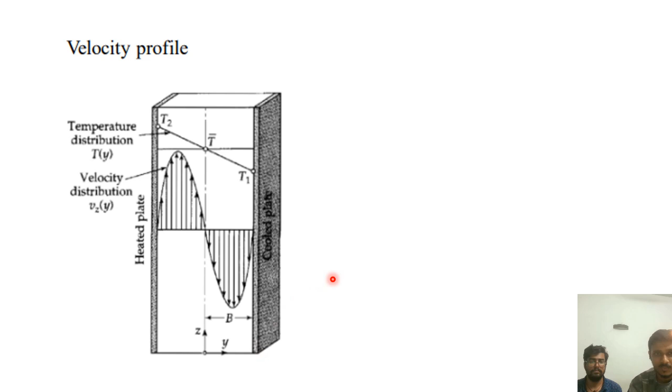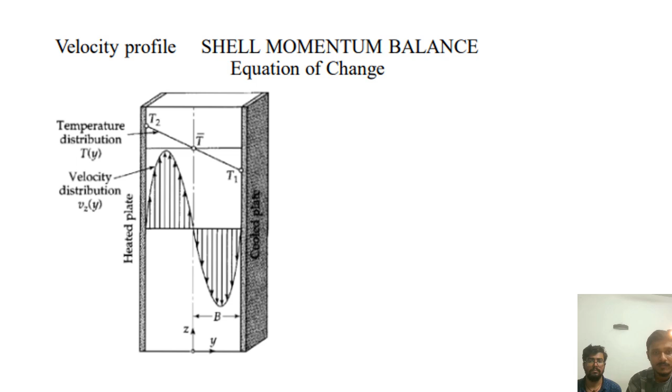Now we will apply the shell momentum balance equation or equation of change. For that, we have these equations. Why will we use the Cartesian coordinate equations? Because this is a rectangular box, and in this rectangular box our equations will be easier in the Cartesian coordinate system.

Next, why will we only consider the z equation of motion and not the x and y equations of motion? The x equation of motion is not considered because there is no variation of velocity in the x direction. And the y equation of motion is not considered because in the y direction also there is no variation of velocity and end effects are neglected. Therefore we will be considering only the z equation of motion.

In this z equation of motion, we will be substituting tau xz using Newton's law. Substituting it here, we get this equation. In this equation, a lot of terms are zero. Let's see one by one which terms are zero and which are non-zero. The first term, dou vz by dou t, is zero because of steady state. Our system is assumed to be at steady state.

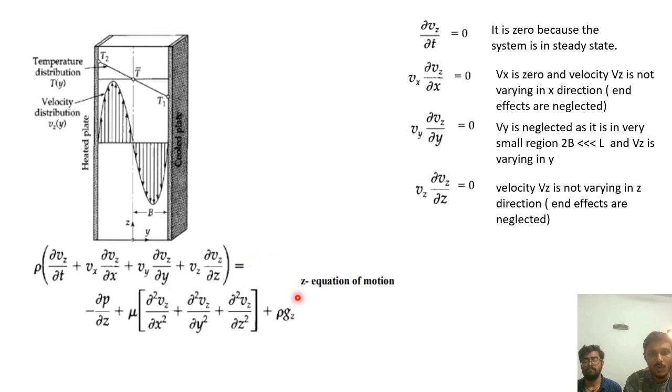Then we have the next term, dou p by dou z. This is not 0 because of buoyancy forces. As we have seen earlier, due to the temperature difference, higher temperature and lower temperature, the density of the liquid is changing. And due to the difference in density, there are induced buoyancy forces. Because these induced buoyancy forces are there, dou p by dou z is not zero.

Next, dou square Vz by dou x square is equal to zero, because again Vz is not varying in the x direction and end effects are neglected. We have already seen this in the previous slide. Dou square Vz by dou y square is not zero because Vz is varying in the y direction. Dou square Vz by dou z square is equal to zero because Vz is not varying in the z direction and end effects are neglected.

And the last term is rho gz. It is not zero because gravity is there and it is acting in the minus z direction. This is our positive z direction, and gravity is acting in the minus z direction. So gz is not zero.

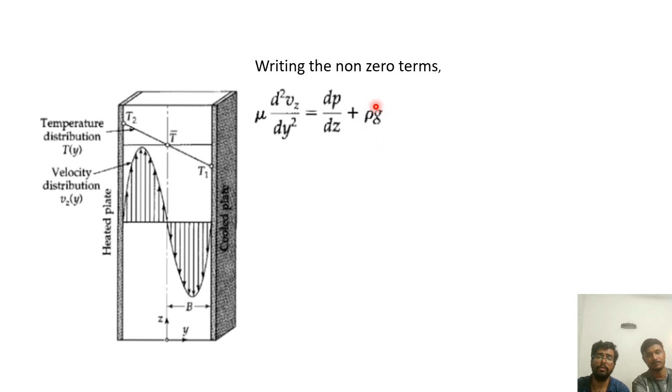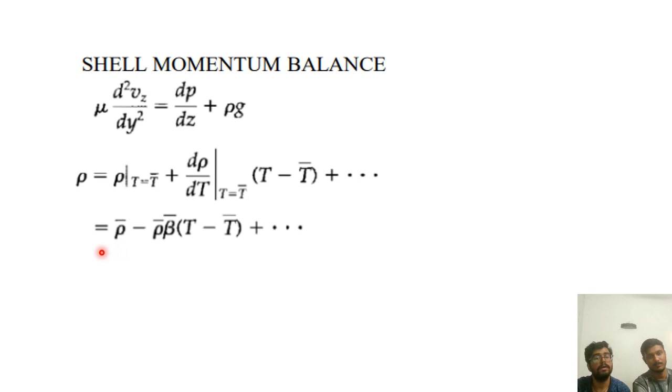So now we will summarize how we got this final velocity profile equation. First we had this equation, and here rho will have another expression which we got from the Taylor series. We neglected the second and higher order terms. Then we introduced the coefficient of volume expansion, and after introducing it, we again wrote another definition for rho, and beta is defined as 1 by v into dv by dt.

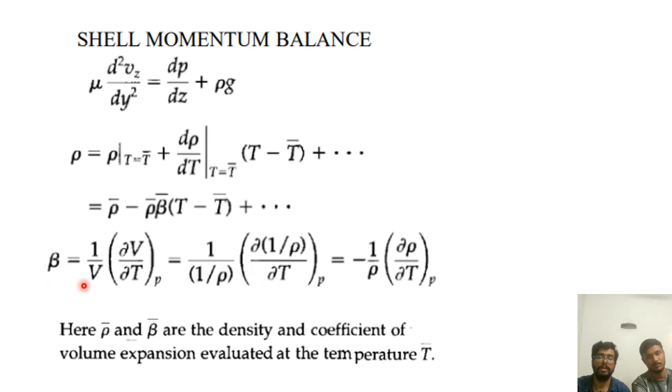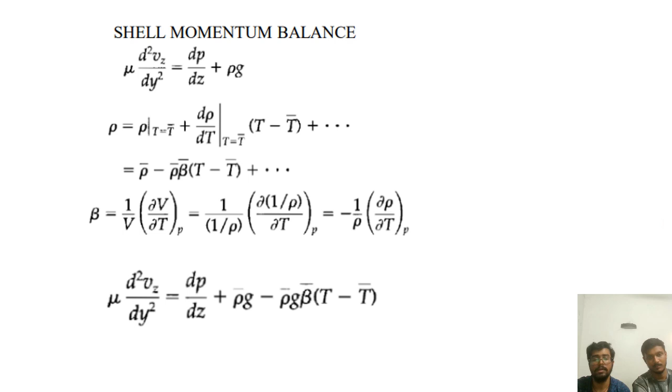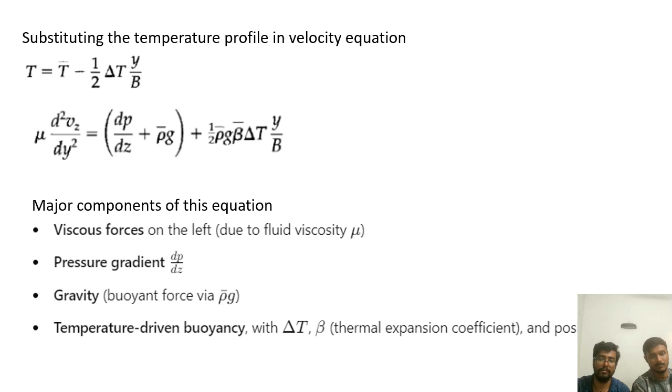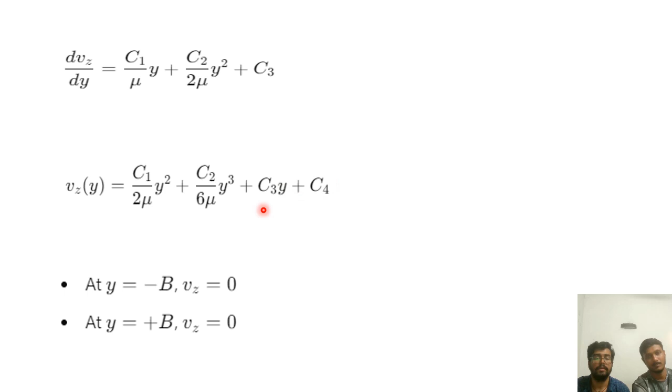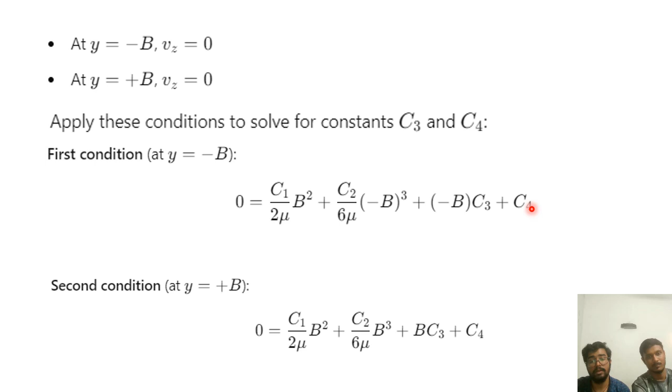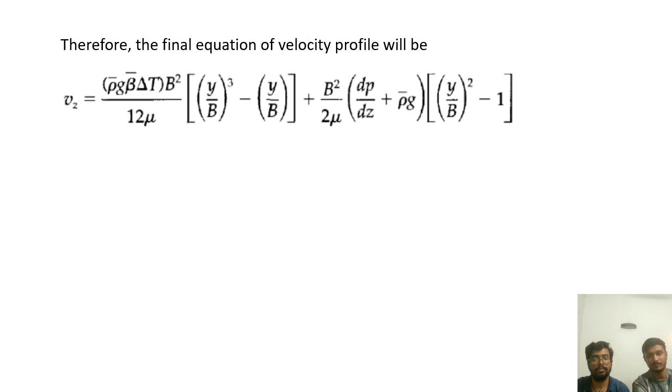And we integrated this. After integrating, we again got two constants, C3 and C4. Next, we applied the no slip boundary condition, and we got two equations. First, we subtracted both these equations and got the value of C3, and after adding both these equations, we got the value of C4. Next, we substituted all the constants, and we got our final velocity profile equation.